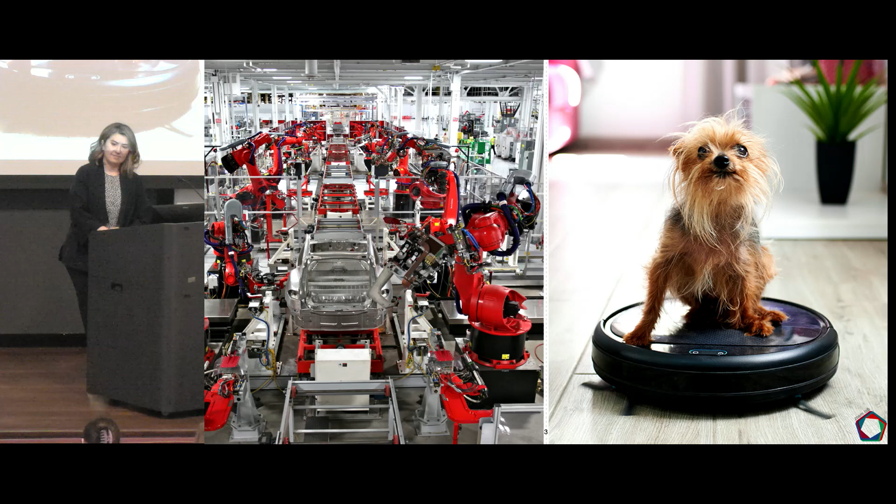But at the same time, we have a very good understanding of this space, which is a very structured environment. We can basically design our space to solve the problem. Sometimes we can even change the problem definition and then design everything to the need. I would say nowadays, though, we are more interested in these kinds of environments and developing robots for these kinds of tasks. Still dirty, dull, and maybe sometimes dangerous, depends. But we are more interested in compact solutions that can work in many different environments that might be structured or unstructured, depending on how tidy you keep your room.

So what are we going to do? How can we actually solve this problem? Or is this problem solved? Because you see that there's a robot vacuum there. Is this problem solved? No, why not? Because I was looking on Amazon, and I saw that you can basically buy a robot, the advanced pro version, for $4,000. It will be delivered to your doorstep, then put some algorithms on it, and it can do whatever you want. So we are done. End of the presentation.

Especially now, there are so many good learning algorithms that we can put on that robot, and then they can probably learn to do very complicated tasks. So is this still not solved? If I buy this robot for $4,000, plus probably tax, can I actually use this robot in these kinds of environments? Or what would it take?

So I basically picked these environments because I am interested in them. I don't want a cooking robot, but I want a helper robot in the kitchen, or maybe a cleaning robot after I cook, because I'm a messy cook. Search and rescue, we have been talking about it since the start of robotics probably, and still we don't have robots in the search and rescue fields doing what the first responders are doing.

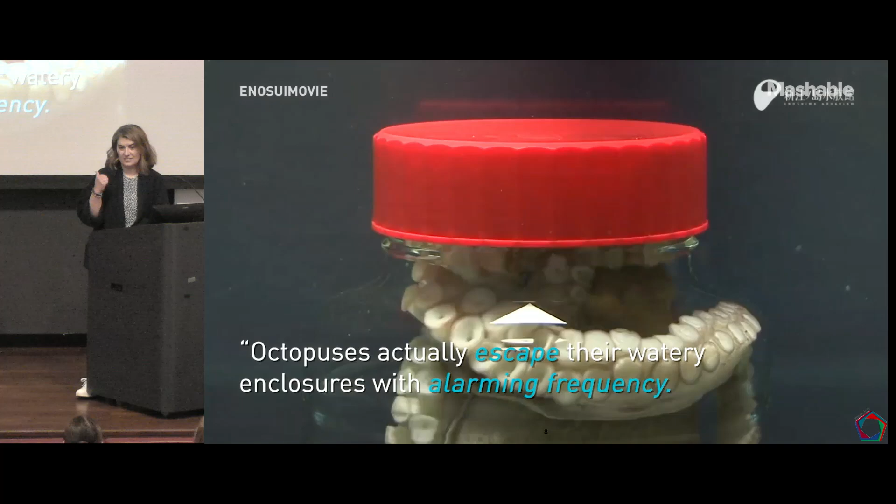If I actually put an octopus in a jar and then close the lid, it can figure out how to turn the lid and open the jar and set itself free. None of those limbs are designed to do this task. They're not fully rigid, right? They are basically not made for this task, but they can figure it out within minutes. So what is the secret here? We have great robots and they cannot, but these kinds of animals can, although they're not designed for it.

So my take, and I'm happy to discuss, is that the robot hardware is what is actually keeping us back, or one of the major things that is keeping us back. So I think embodiment dictates the upper bound of adaptability of whatever algorithm you have. So then, if we want to make robots more adaptable, how can we make them? I approach this problem from two different perspectives, manipulation and locomotion, which are the main features of robots that we have around. So I will show you a couple of examples from my lab today.

These are all the people that are working on these projects. I'm not taking credit. I'm just seeing them once or twice a week, and then we talk, and then I'm like, oh, wow, it's amazing. Keep going, and maybe look at this idea, and they are doing the fun work in the lab, so I'm proud of them, and I'll share their work. And we are a very friendly lab. If you are curious about any projects, please do not hesitate to reach out to these students, and they are more than happy to talk to you anytime.

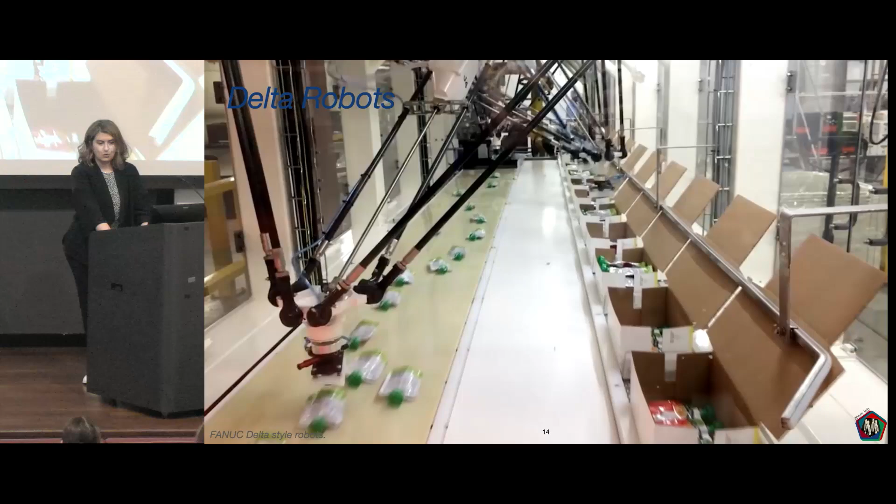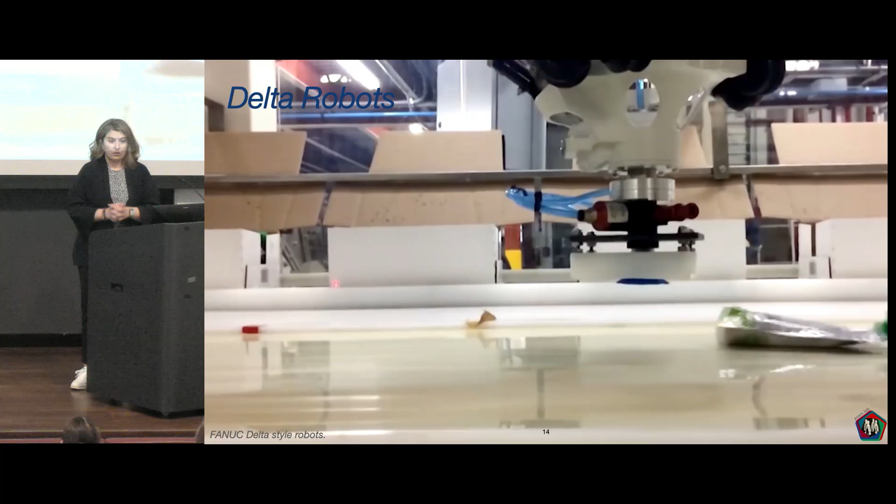Okay, let's start with manipulation. For me, manipulation all started with Delta robots. If you don't know what Delta robots are, they basically have 3 degrees of freedom. They're manipulators. They're very fast. The 3 degrees of freedom are in the translational domain, so X, Y, and Z. And all the mass, all the motors, are at the base, at the top. That's why the linkages are very lightweight, so they can be very fast, precise, and accurate. We really like them for pick and place motions, especially when we don't want people to touch what is being picked and placed, like food or medicine.

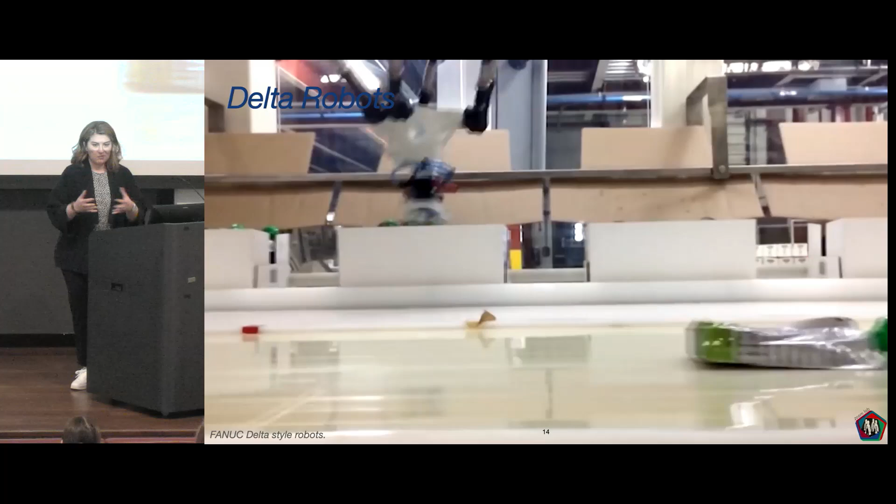So when I started at Professor Wood's microrobotics laboratory, I was looking for a fun project to learn the fabrication tools that they have, which was laminate fabrication, everything at small scale. You cannot use screws, nuts, bolts. So I was like, oh, maybe I can work on making a Delta robot at very small scale with sheet materials. So this was my first project at Harvard. So we built this super fast Delta robot. You can see all these triangle pieces there are piezoelectric actuators. They can work very fast.

Each actuator has 75 to 100 hertz or 100 plus hertz frequency. Although the workspace is very little, we have very accurate and precise motion. And what we actually realized is since this is very compact, we can use it for handheld surgical tools to stabilize the hand tremors that the surgeons have.

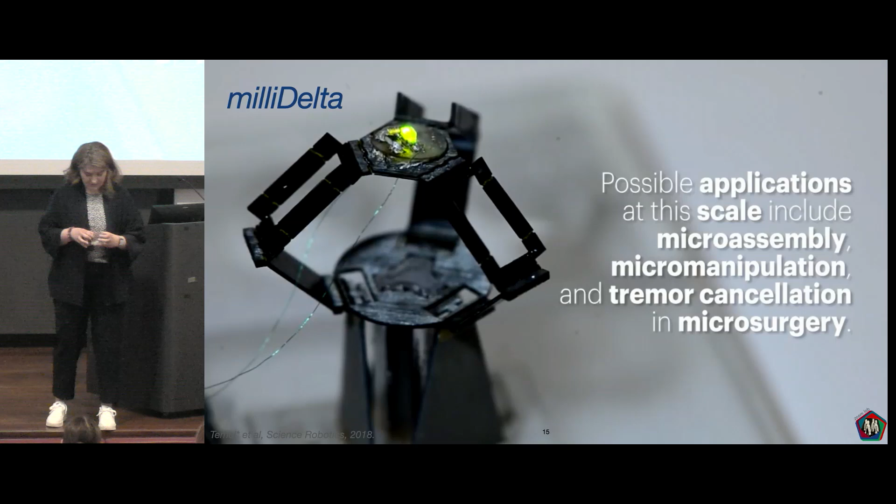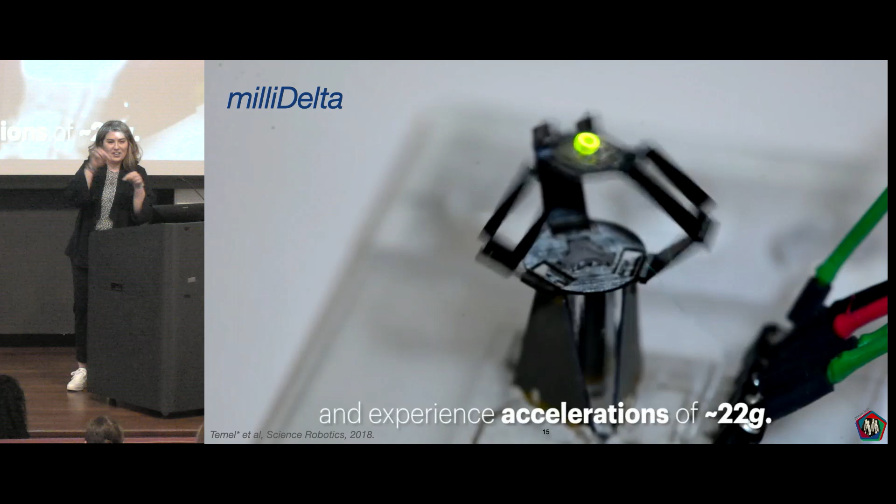Okay, so after this work, I was presenting it at Carnegie Mellon, where I now work, and Professor Oliver was like, oh, your Delta robot is amazing. Let's make a hand with all these Delta robots. They can be great fingers. And this was 2018. It was my interview. And I'm like, I don't know about manipulation, but I think there are a lot of hands in literature. So I was actually right.

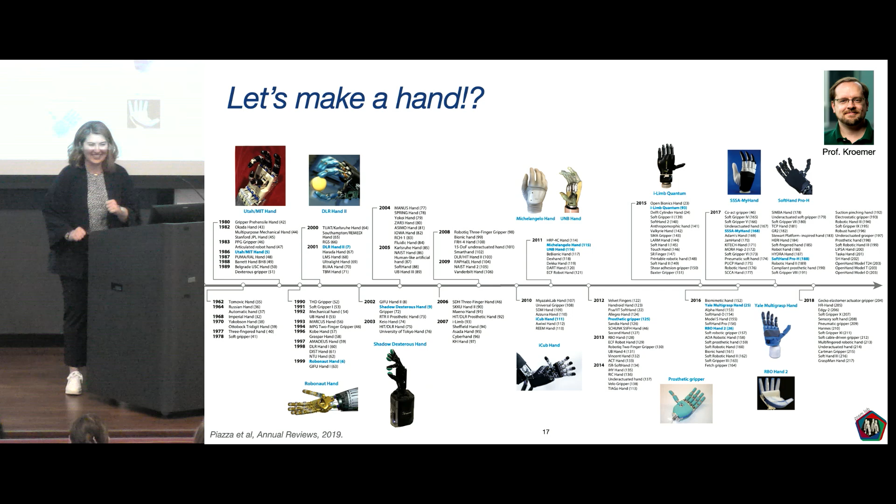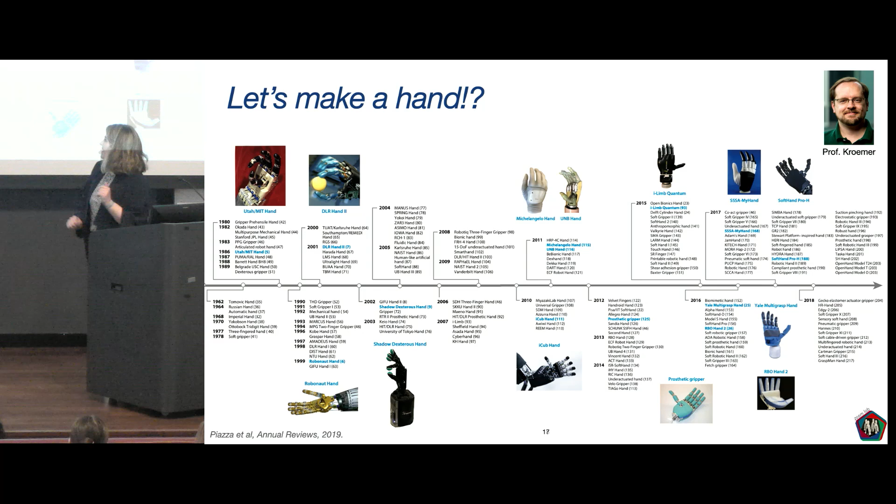These are all the hands since the start of hands in robotics to 2018. And I was like, why do we make a hand? There are already so many people working on making hands. Does it actually make sense? And since 2018, there are actually more hands, with all sorts of materials, manufacturing techniques, scales, and everything.

So honestly, making a Delta hand seemed very ridiculous to me. I was really not sure about this idea, so we should talk to some other people to see if it's actually viable or meaningful or not. So Oliver said, okay, I know two people, Professor Admoni and Mason, Henny and Matt. If you don't know Matt Mason, he is one of the founders of robotic manipulation.

And we presented them this idea that we can work on building some manipulators, grippers or hands that have fingers with multiple degrees of freedom that can perform dexterous manipulation tasks that might be useful to open a pill bottle, take a pill, and feed it to patients. Good idea, but these manipulators should be soft, or safe, if they're interacting with people, and they need to be strong enough if they're opening a pill bottle. You apply quite a bit of force when you try to open a pill bottle.

So safety for humans, and we want it to be accessible, so it needs to be cheap because we want it to be available for everyone. And we want many of them because we need these dexterous motions. So we thought that living hinges, which are basically embedded joints in the structures, are probably the best way to go if we are thinking about the cheapest and easiest manufacturing technique, which is 3D printing. This is where we started.

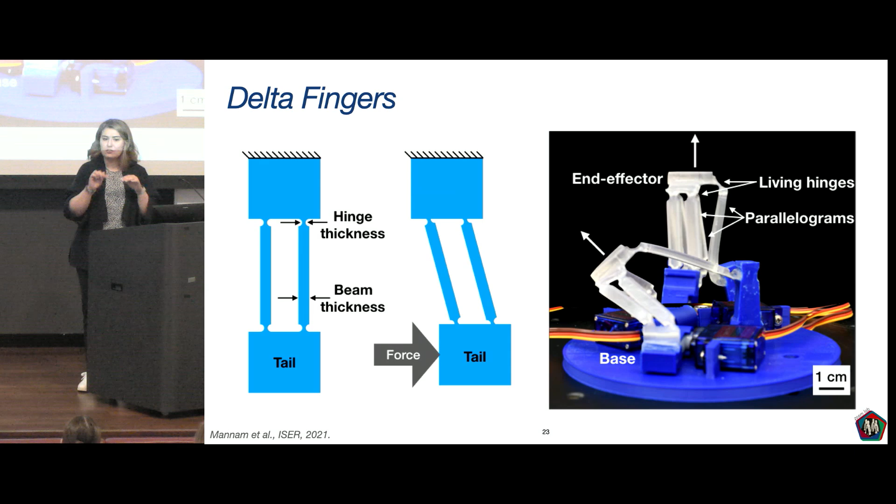So there are advantages and disadvantages to this. First of all, if that rotation is happening, then I want to be able to control it, or at the very least know when it is happening, so I can actually learn the behavior of my manipulator. And second, I actually don't want it all the time, because that 3 degrees of freedom is very helpful for certain tasks.

So we studied different materials, different dimensions, and we figured out that there's a good solution. We can do that if we characterize materials and dimensions properly. And if we go out of a certain workspace, then the end effector will start rotating. So we can actually use that to our advantage too.

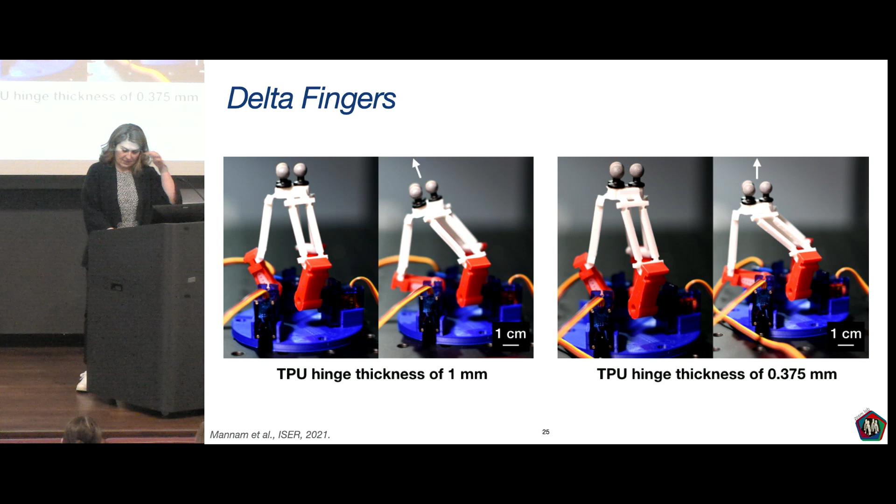So to demonstrate this, and the capabilities of delta fingers, we put 2 of them together and made a gripper. There's a difference between the previous slide and this one. Here, I now have linear actuators instead of rotary actuators. That is because I want to make everything compact, and from now on I will show you mostly the linear actuated deltas.

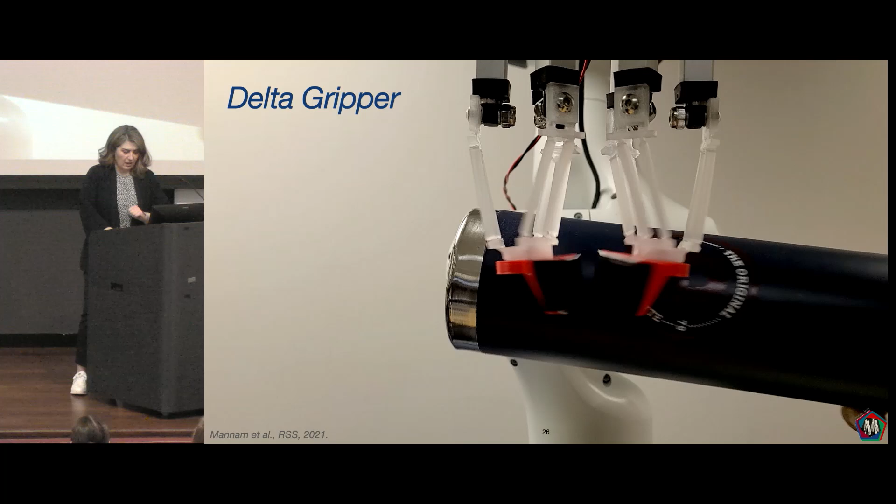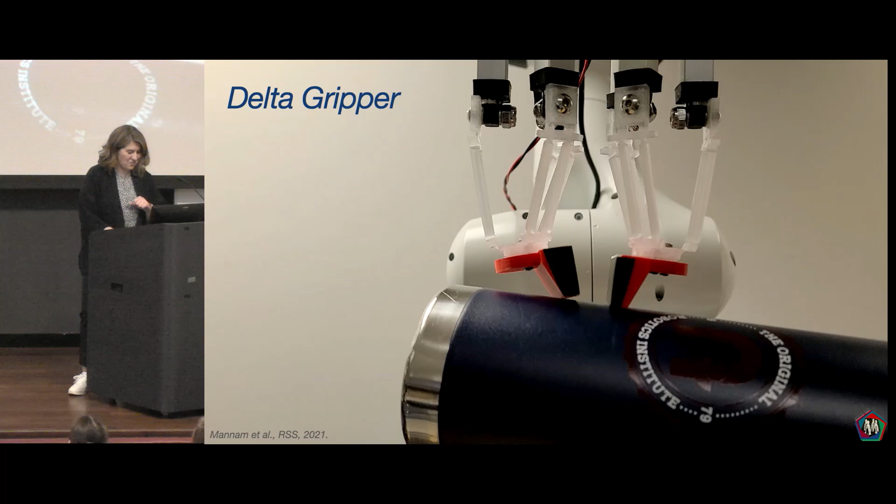So even though they are 3D printed soft end effectors, you can see, and this is the obligatory robot hitting video that we needed to record, they are pretty robust to different forces.

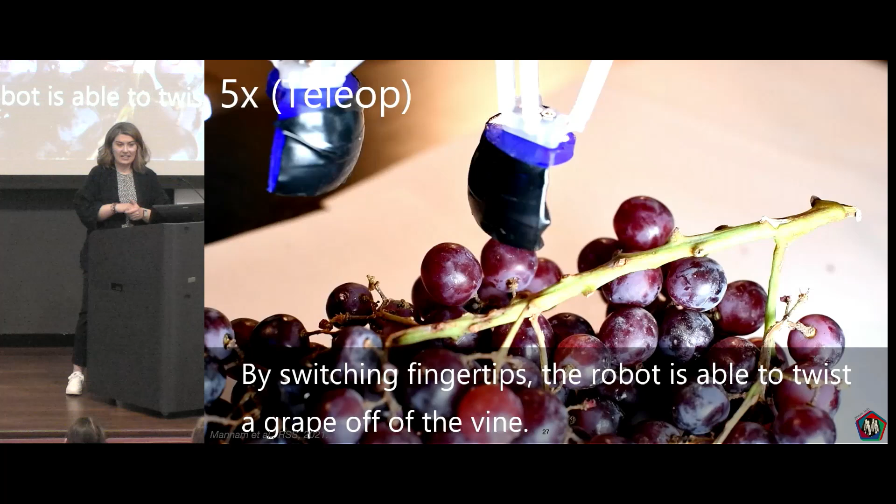And we actually show that if we add some different fingertips, we can do different kinds of dexterous manipulation tasks. I didn't know that these tasks were the tasks that most manipulation people were interested in. But here we are picking a single card from the deck. This task was very difficult because apparently we need to apply quite a bit of force to get the grape out of the stem. But we were able to do that.

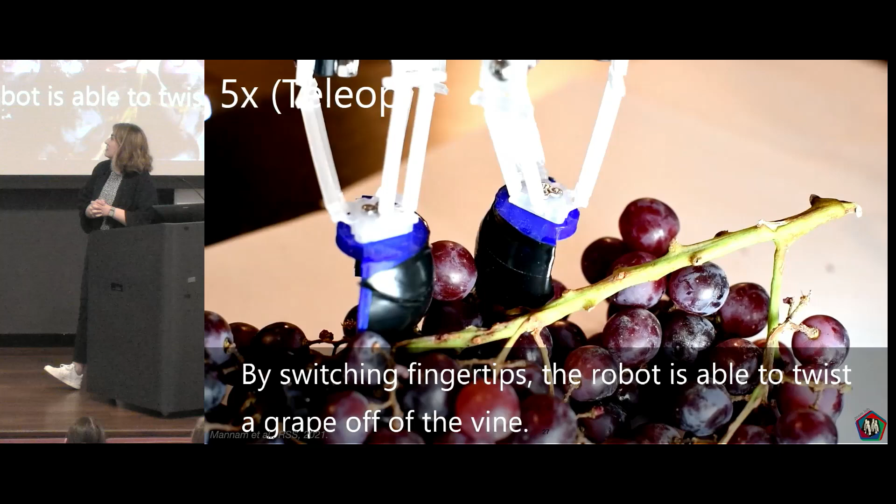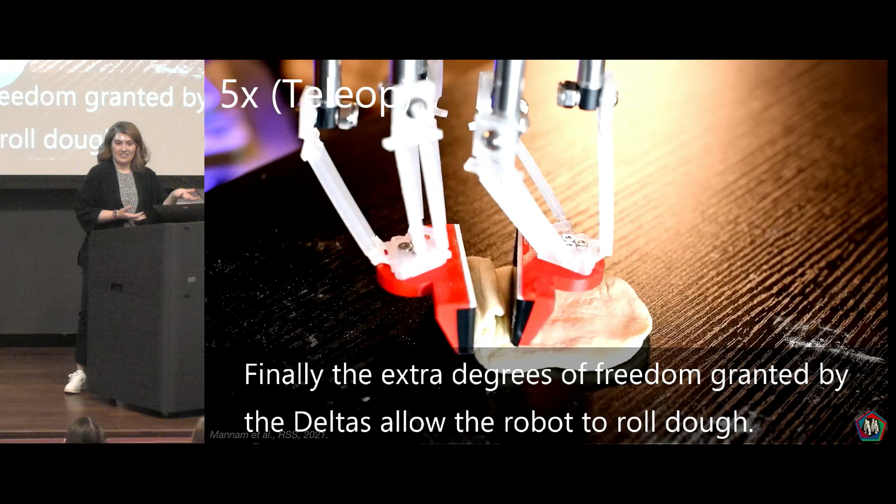And in the last example, you will see that, let's get the grape first. Yes, grape, amazing. And we are not squishing the grape, if you notice. And we can do the dough manipulation. So this was actually very interesting for us because soft body interaction was really interesting to look at, both from the robotics perspective and also the dynamics perspective. So it was a little bit challenging, and they're all teleoperated, you can see here. But eventually we showed that, oh, okay, we can do that.

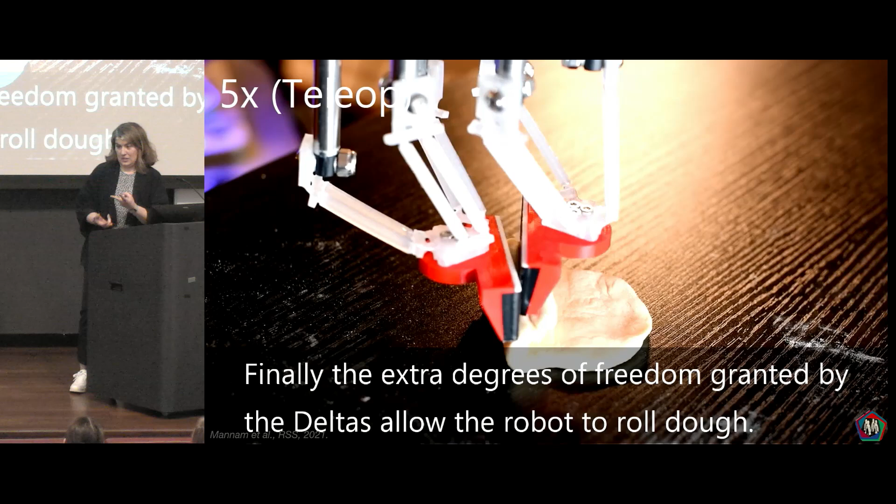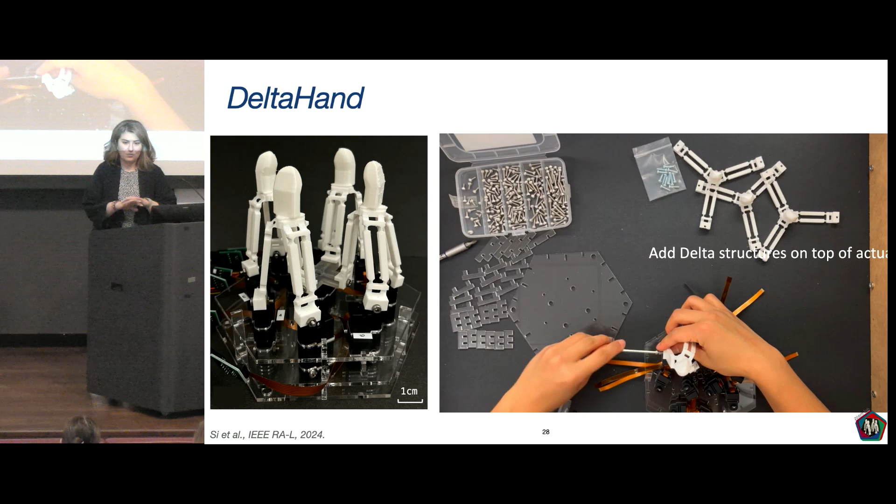So once we had 2 fingers, the next natural step for us was building a hand. And this is basically what we did. So here the graduate student Zilin is putting everything together. You can see all the materials here. If they're not 3D printed, then they're like screws and nuts, it's fine. And then the plates are laser cut. So very cheap, very fast. You can manufacture it within minutes, maybe a couple of hours. Again, we wanted to test it to see if it's strong or not.

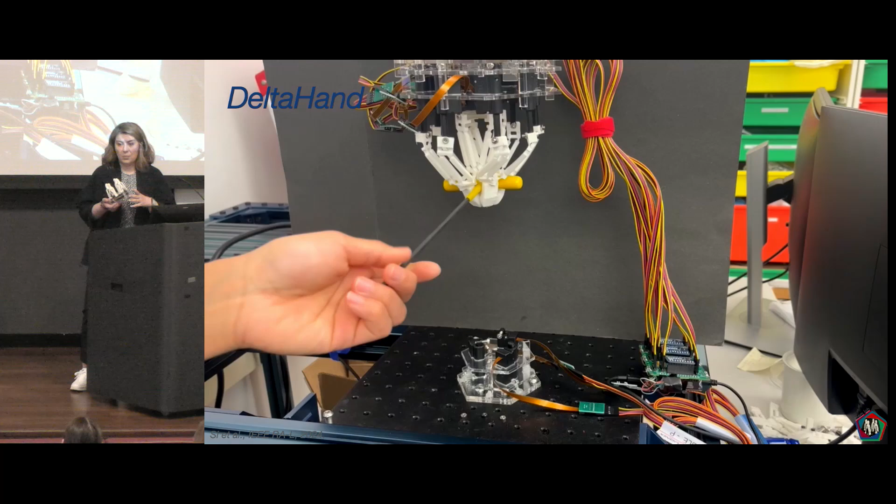And then we studied different synergies. So I told you that delta robots have 3 degrees of freedom, which means that they have 3 actuators, right? But if I put them in this kind of a configuration, then I can actually study coupling of the actuators if I want to. So I can couple some of the actuators together, some of the links together, and then I have 9 actuators. I have here a 5 actuator one. I'll just pass this again.

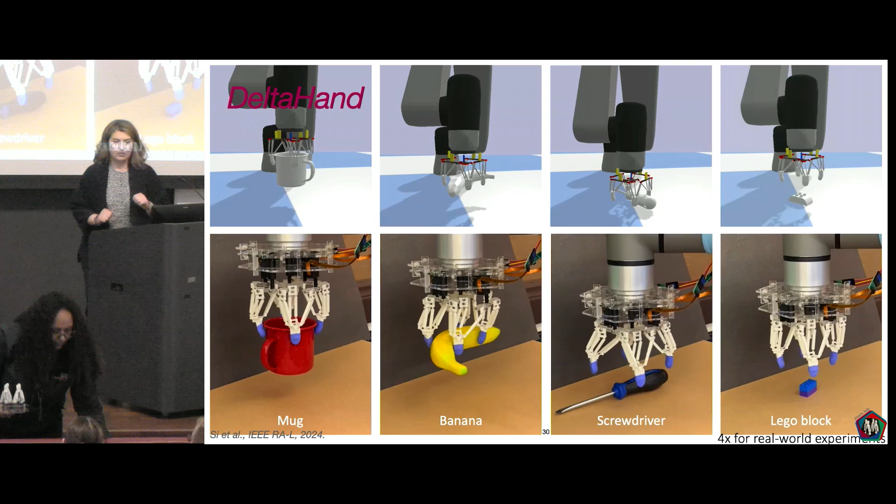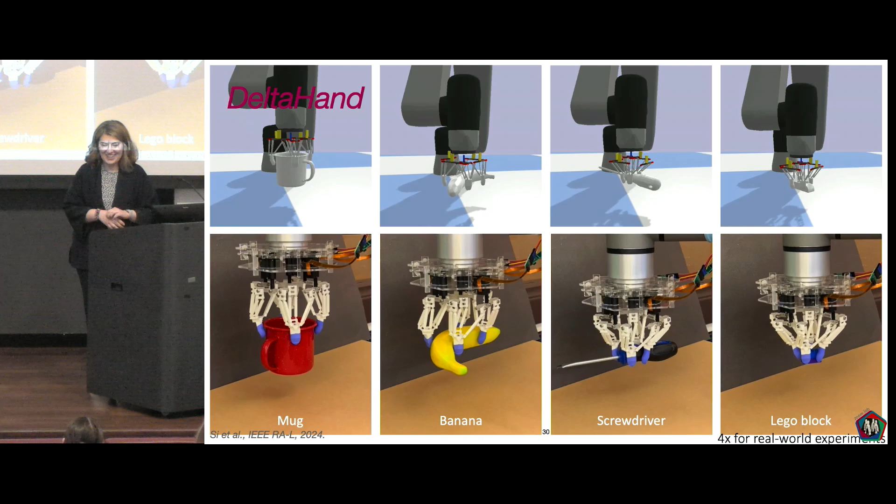Since they were traveling with me to a lot of places, they are actually not super robust, because I think they're broken in my luggage and backpack, but still you can get the idea.

So we studied the synergies between the actuators and linkages. So if we have 5 actuators, 9 actuators, 12 actuators, what kind of tasks we can do. And you can see here that there are a lot of different tasks that we were able to manage. And Zilin is using the Leap camera and then teleoperating with the finger motions. And then we thought that the easiest mapping is between 2 fingers of both your hands to the 4 fingers. And you can see we also did a lot of dexterous manipulation tasks.

Yes, you can hit it. Again, they were in my backpack with a lot of things on top. It's totally fine.

So there were a couple of problems, though. We wanted to see more definition in the motion. So instead of printing them from a single material, we switched to multi-material 3D printing to make the links a little bit stronger. And then the next thing is that the control of this hand was not the easiest thing with the camera there, as you can see, because if you are moving your hand, you're not always at the same altitude, and it was affecting the control. And it was also affecting teaching the robot how to do the tasks.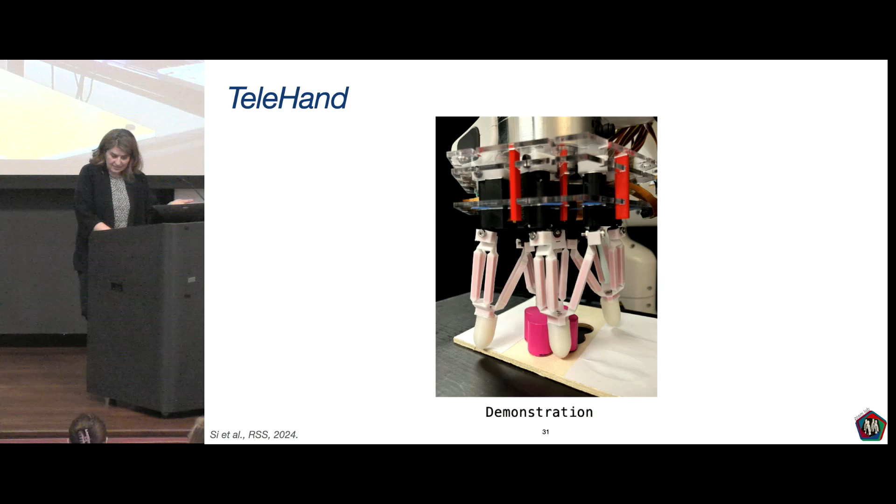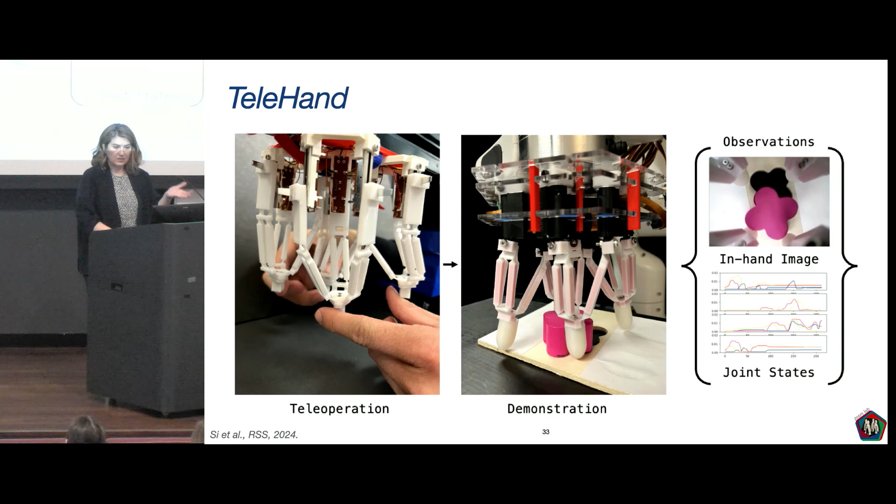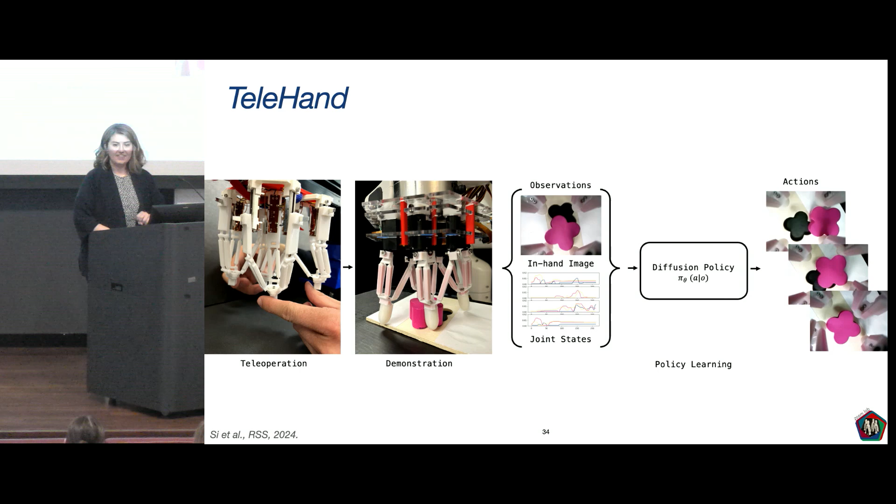So what we did is that you can see the difference now in the color. This is a multi-material 3D delta. We also built a twin of the delta. We call it a mechanical twin or kinematic twin. You can see the sliding actuators there, and then we call it the TeleHand. And we took the data that is coming from the camera in the palm, in the middle of all the deltas, and then we took the joint states, and we did some magical learning stuff there that is totally out of my domain, so I'm not talking about them as a mechanical engineer.

And we performed some training for the Delta robot with this teleoperation system. And the Delta hand was actually able to learn a lot of these tasks from a few training data. We performed 20, 40, 60, 100, and then the success rate was really good. And we also generalized it within different kinds of tasks, like rolling a ball in the hand. Syringe was really difficult, so we actually did a syringe push. Shape insert is also a very classic task that we did. But we basically performed a bunch of dexterous manipulation tasks very successfully.

So then things took some turn because we were like, oh, okay, this is what we think. I like the kinematic twin better. It makes sense because I like hands-on things. But would people actually like that too? What is the best method to teach people how to train the robots? What would be the preferable way? So we did some user studies. We asked people to control the robot either through a kinematic twin or a visual tracking system, and then collected a lot of data.

Oh, thank you. You can keep them.

Not until the end of the... Okay, and then we ask people to perform these 3 tasks. Basically, it is a block sliding task, but it gets more and more difficult, because we are changing the angle about how you slide the block. And the results were actually very interesting to me.

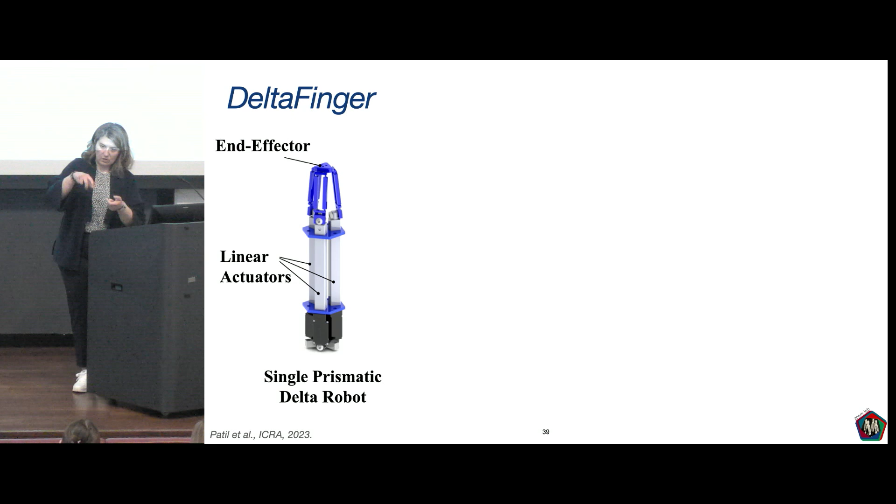Yeah, so we really wanted it to, how can I say, buckle after some forces, if you are especially designing this to interact with people, right? So I don't want the robot to be able to apply a lot of forces. So we did a lot of studies about where should the actuator be located to apply enough force for these kind of tasks. So it was modeling and experimental studies about what is the design of this robot so that I can get enough force to do these things, but also buckle when I need to.

Yeah. Okay, so we have one finger. Cool. We put 4 of them together, made a hand. Great. What's the next step? What? Yeah, maybe. It's actually a good idea. We studied the 3rd finger thing, the thumb thing. It's not published yet, but we are working on it. But we wanted to go crazier.

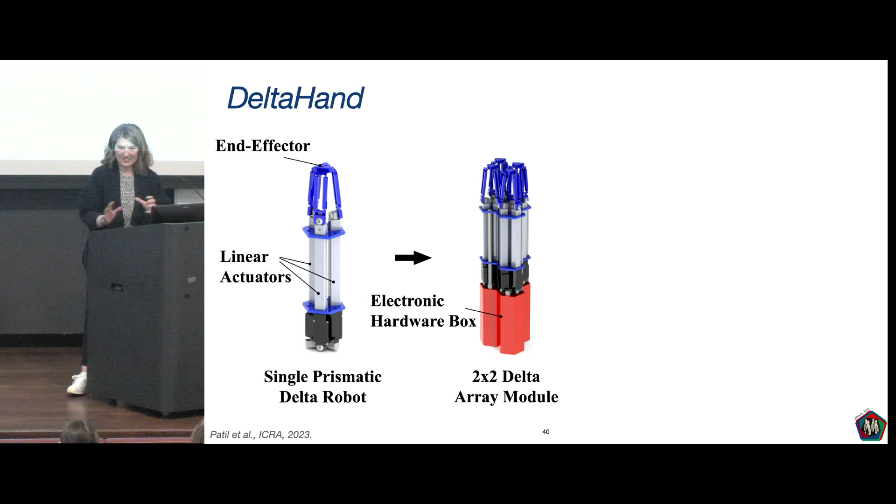And to some people, the next thing is the craziest setup at Carnegie Mellon Robotics. Why not we make like 64 of them? I see some faces and I'm like, why? Come on, we want to have fun. Look at this, isn't it cool? So you can see a lot of these kind of examples actually in literature. Most of them are doing like 1 degree of freedom motion, right? This whole array of robots doing 1 degree of freedom motion.

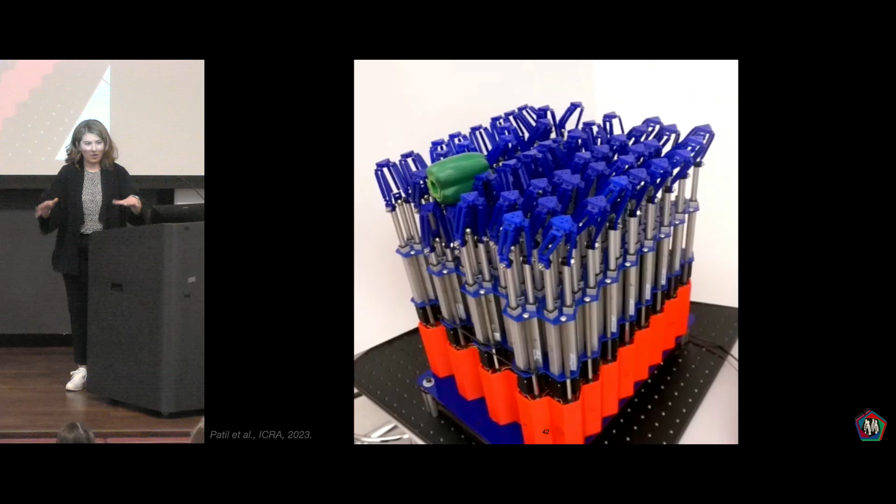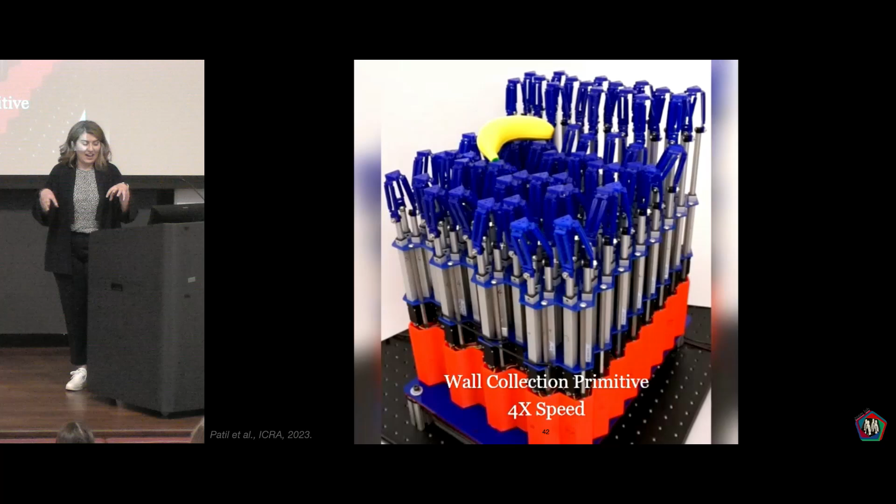Here we can do like 3 degrees of freedom. So we can actually study a lot of different tasks. We can divide the robots into groups. They can do different tasks at the same time. They can deal with multiple materials at the same time. They can create structures like walls to basically help them, and this is a great control problem. How will we control these robots?

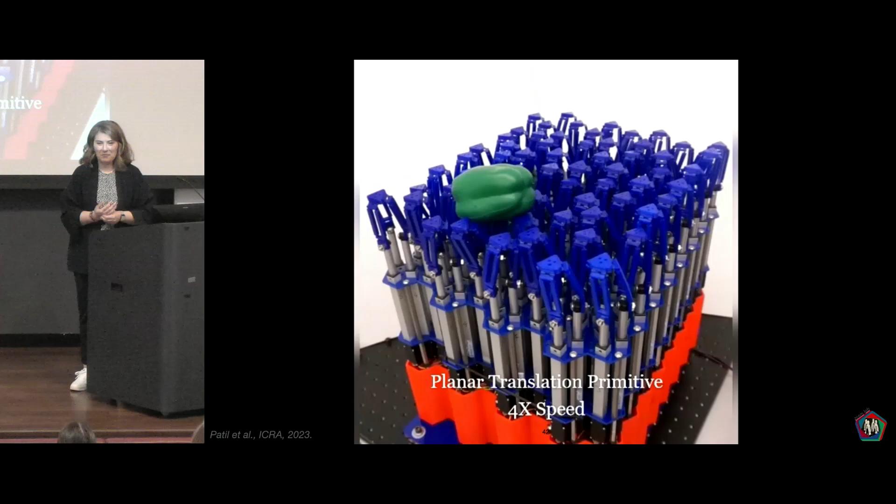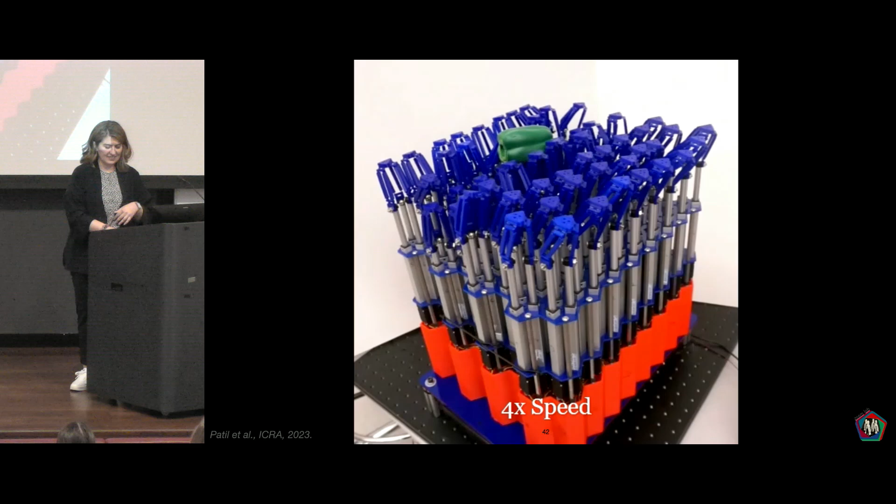They're all compliant, soft. These are not multi-material. These are all TPU. So how will I actually control 192 actuators, if I did the math correctly, in a meaningful way in the space? And why did I do that? Because again, I want a robot to help me to cook. So I want to turn this robot upside down, like in this photo. And I wanted it to open a dough for me so that I can make pizzas or whatever I want to, right?

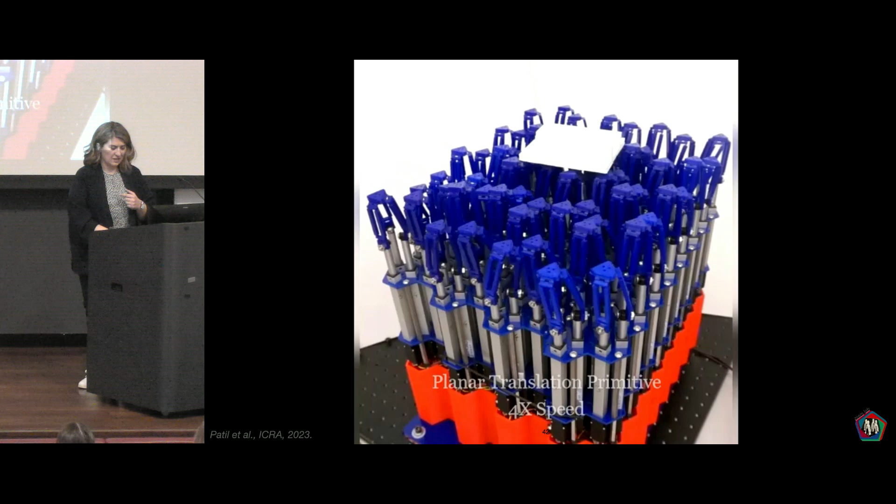So in order to do that, you can see that this setup has nothing on top. But in the next one, we added some fingertips, so that we can actually interact with objects easier. And those fingertips are inspired by our own fingertips, have a rigid core and a compliant shell, so that we can actually capture the materials better. I'll only show one video, and I'll tell you what the problems are we are facing. So this is the first time we were actually able to take a block and lift a block in air using a couple of them. Because first of all, again, kinematics are not very well known.

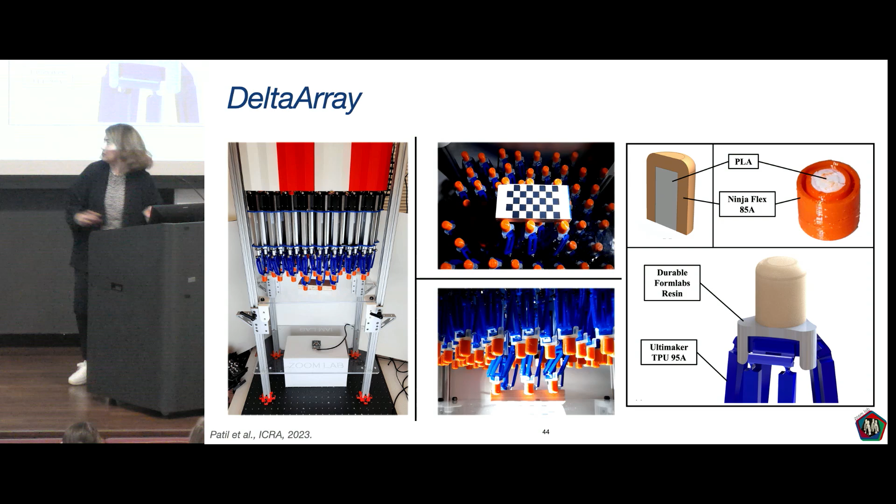We have a camera, you see here under the setup, but most of the time, if you are looking with the camera, the block is blocking some of the robots, and sometimes the robots are blocking some of the robots, so it is not the best way to control. And there are 64 of them. So it is kind of a multi-agent control problem, and multi-agent learning problem. How are we going to find the right way to control?

So we are now working on this. I'm very excited. I saw the faces. It's a crazy setup, but I think it is a great setup to learn about all these different kinds of control and learning problems.

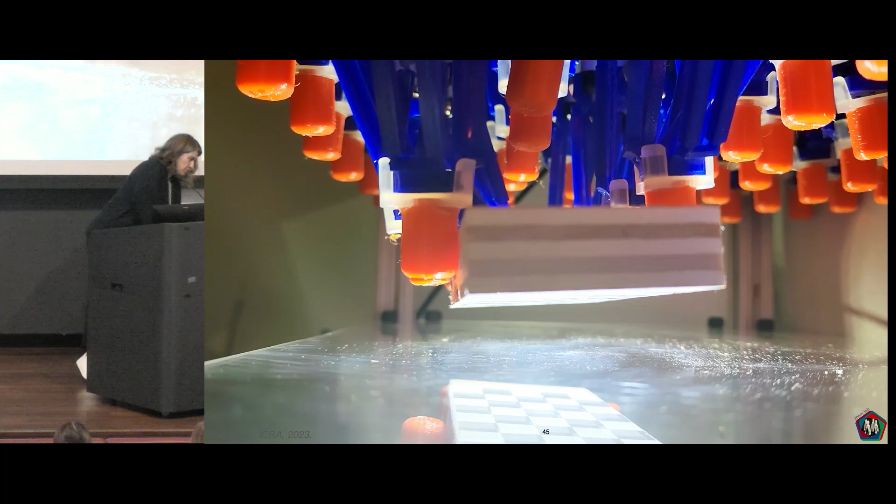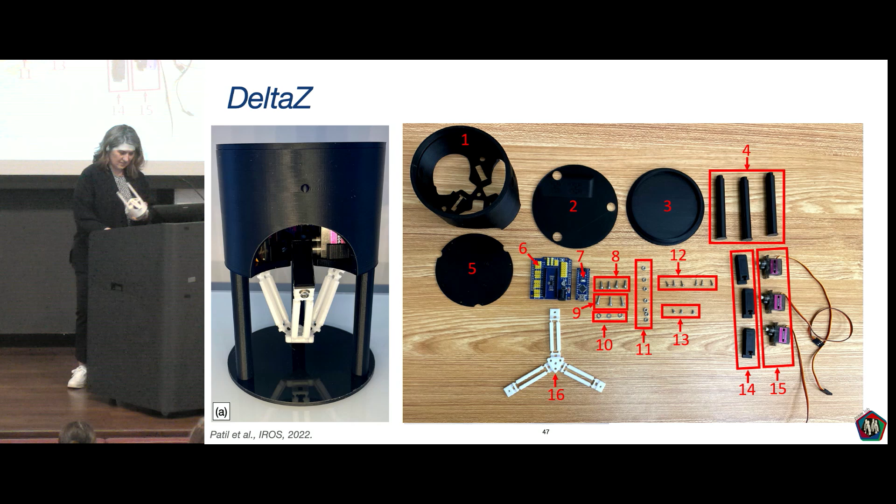Okay, one last thing about this. What we also did is we basically turned the Delta robots into a very affordable learning tool for robotics. So this is Delta Z. You can see all the parts here. They're all online in GitHub. You can find how to design, how to make, where to buy the components. You can also design and build your own end effectors and then put them together.

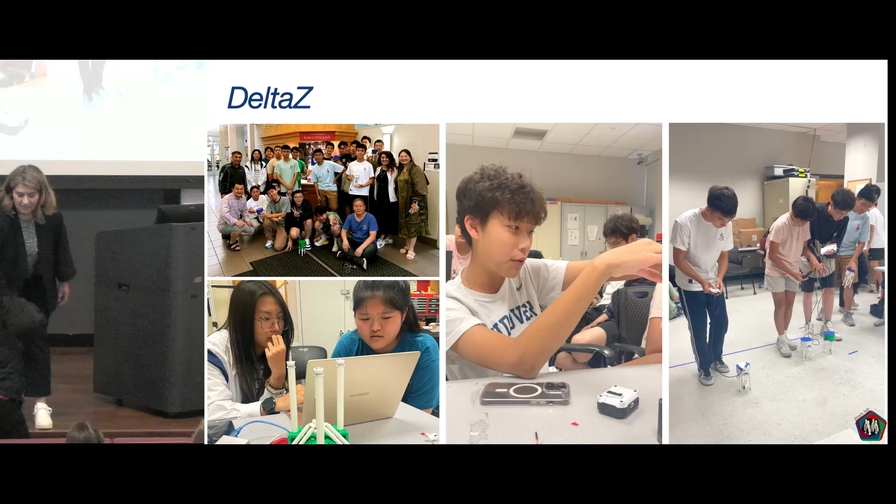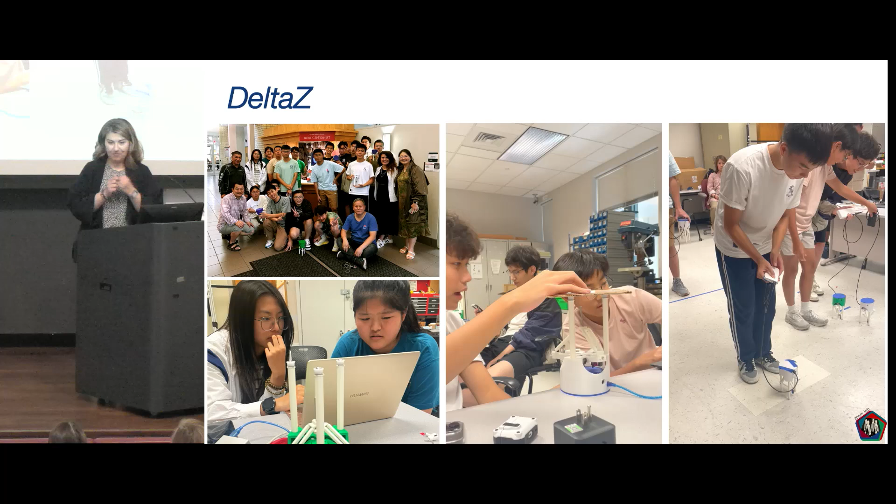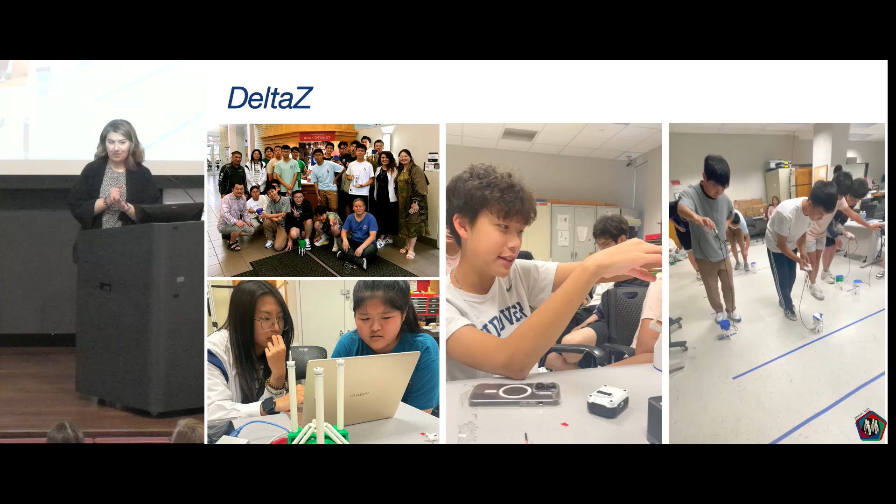We also put together a user interface for you to play and learn. And then we made a curriculum around this robot. So this robot is around $50, so not really very expensive. And you can actually teach everything about robotics. This is my claim. You can teach everything about robotics using this, from design, manufacturing, because you can also use different manufacturing techniques, right? From actuators, how to control them, what kind of sensors you want to use to control them. If you want to actually apply some learning algorithms on it, if you want to do computer vision for it.

And also, this is what my summer school students did. They said, oh, we want to make a walking robot, like a moving robot. And I'm like, this is a manipulator. Why do you want to make a walking robot? But they added some wheels, as you can see on the videos, and then it turned into a walking robot. So you can even teach manipulation or locomotion using this robot.

Again, this is all open source. You can find it online. I'm organizing another summer camp using this robot this year. I'm very excited about it because it's just fun to see how students also bring their own ideas.

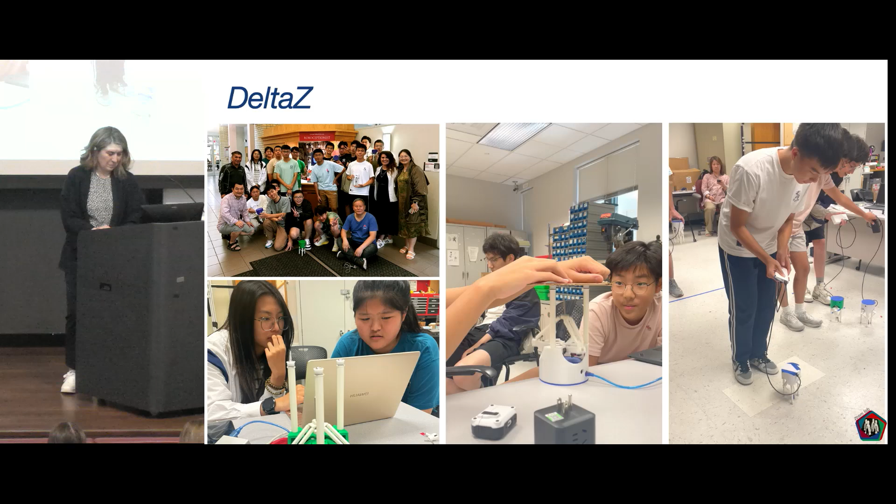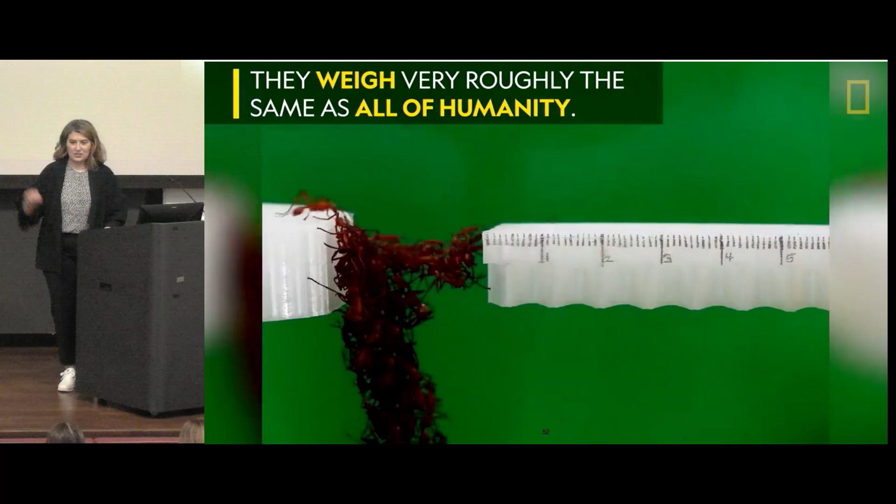Okay, maybe this is a good time to switch topics from manipulation to locomotion. So I will talk a little bit about collaborative robots to show you how I can make the locomotion more adaptable to different scenarios. So for me, this all started with this video where army ants are coming together to build a bridge. The amazing thing about army ants is that they can actually build this bridge and then change the shape or structure of the bridge with the changing conditions. So they are adapting to dynamic environments.

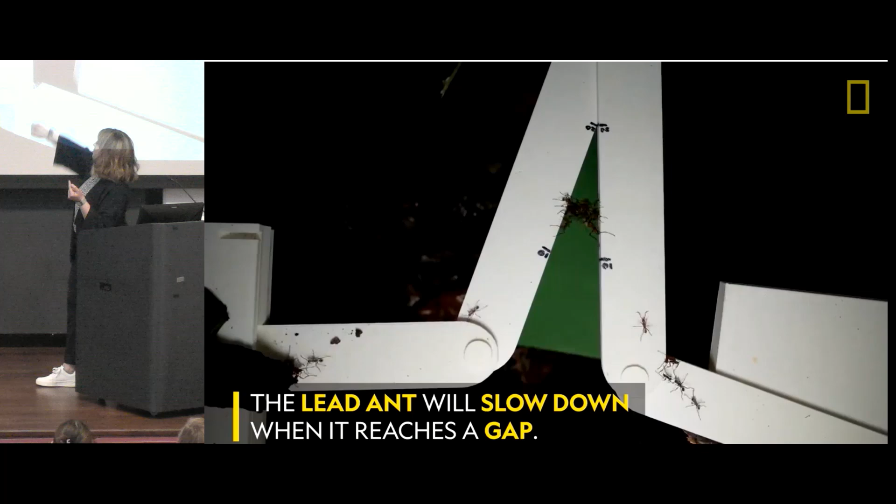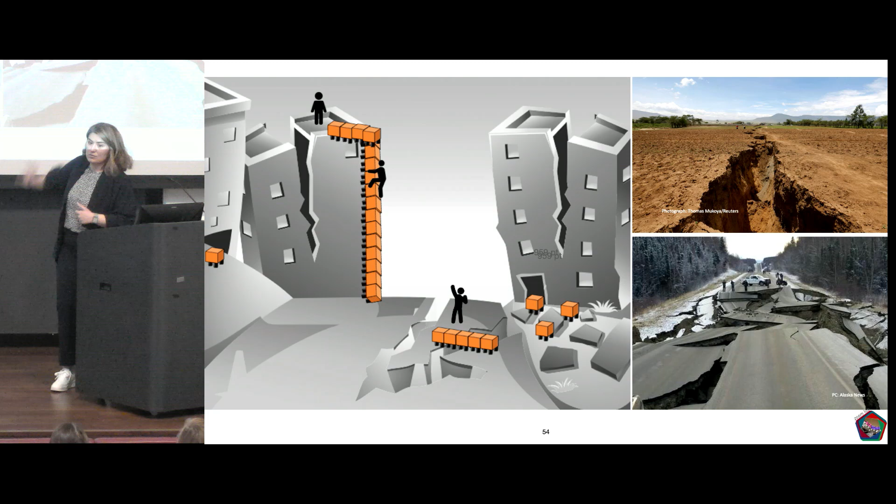The other thing is that they are very smart, although they are super tiny. So for example here, they are not going all the way up and coming down, or they are not creating the bridge here. So why do they pick this? How do they optimize their path and then make the bridge there? How do they know how many ants they need to make the bridge? How do they know how much load they need to carry? They are all very interesting questions. So we thought that if we can figure this out, then we can basically make robots to work in disaster zones.

Okay, so what do I want? I want to make reconfigurable collaborative robots. I want them to work individually, like ants, but I also want them to come together to overcome obstacles. And many different kinds of obstacles. They can be negative gaps, or they can be positive gaps. They can be just step downs, right? Different things. I want them to be energy efficient, because this is one of the problems in those kinds of fields. And I want them to be strong enough to perform the tasks that I want them to perform.

These are the puzzle bots, the first versions of them. You can see they look nothing like ants. But at the end, that's not the purpose. The purpose is to study their behavior and see if we can do the same things with robots.

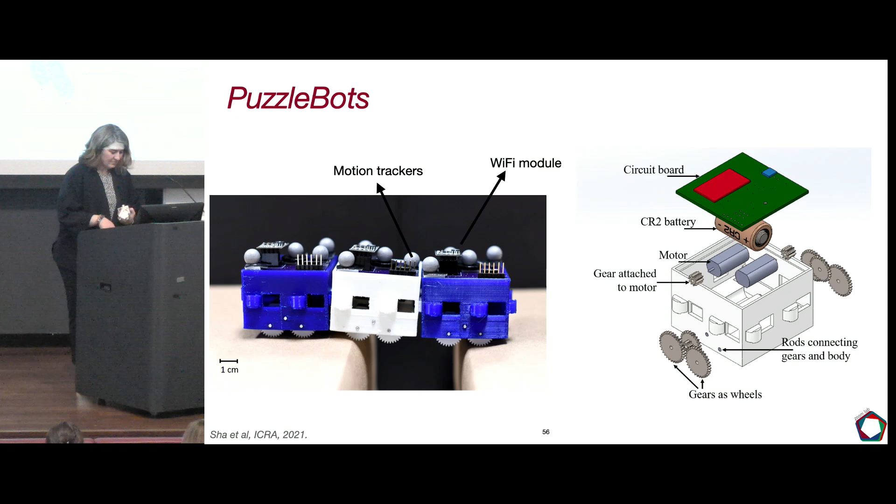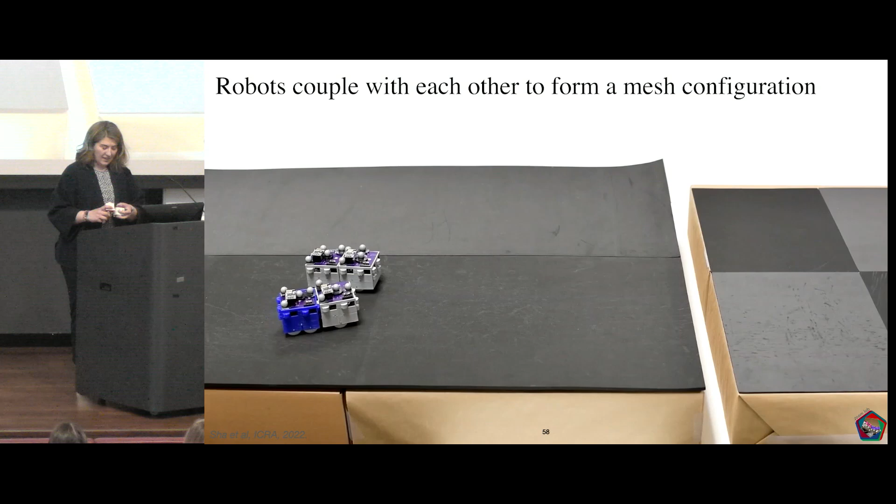Here is the first video that my graduate student, Yisha, recorded, which I really like. So they form a bridge and then cross the gap. And not only can they form a line, but they can also form a mesh structure to, you know, cross bigger gaps, because now they are stronger.

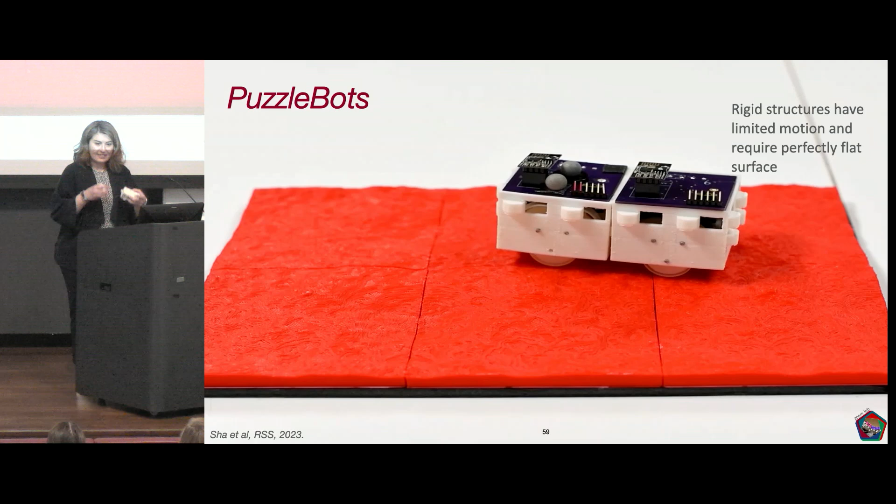But they suck at something, which is uneven terrain. Because at that time, their connection was rigid, they connect through knobs and holes, and that rigidity really didn't help them to cover those kinds of terrains. The other thing is this. They fail terribly if they are trying to take a step down.

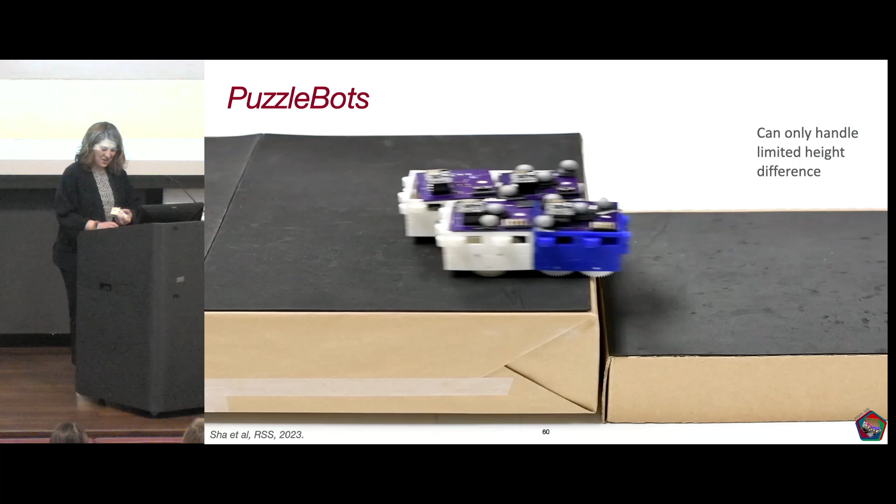So the solution to this is we needed a flexible attachment between the robots. And again, I am very frugal with respect to adding actuators or sensors to robots. So I was like, I don't want it to be active, I want it to be passive. So Yisha designed an anchor mechanism that is easy to connect and difficult to disconnect. And we did some experiments with those robots.

So I have a couple of them here. I'll pass them around. One of them is not very well assembled, so you can actually see what's inside. I like this. Yeah, I wish I could carry the 64.

Anyway, okay, so this is how they attach and detach. You need a little bit of a wiggle between robots to detach. It's very easy. Now, because they have the flexible structure, they can actually take turns, which is really helpful for us to clear these kinds of environments. Now they are successfully going across these kinds of terrains.

Do you have a question?

Okay, sure? Okay. And the other thing that we can do is they can now take a step down, I think. Yeah, come on, you can do it. Yes, come on, yes. Yes, they can do it.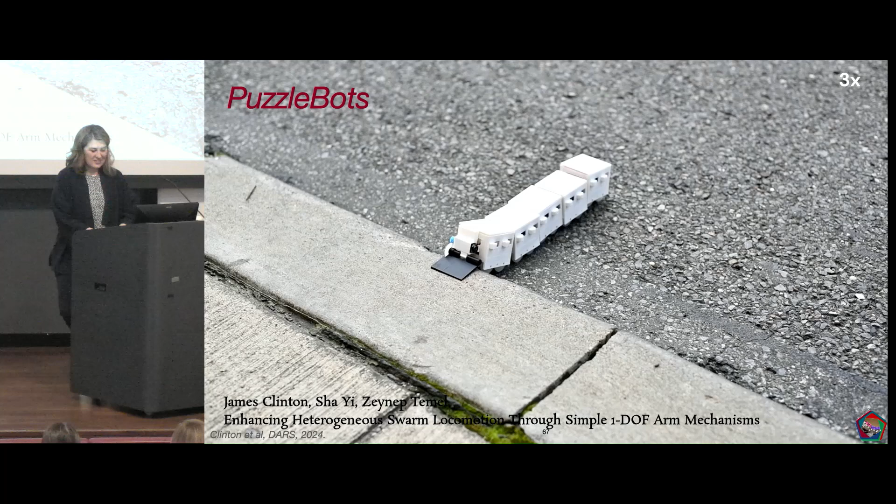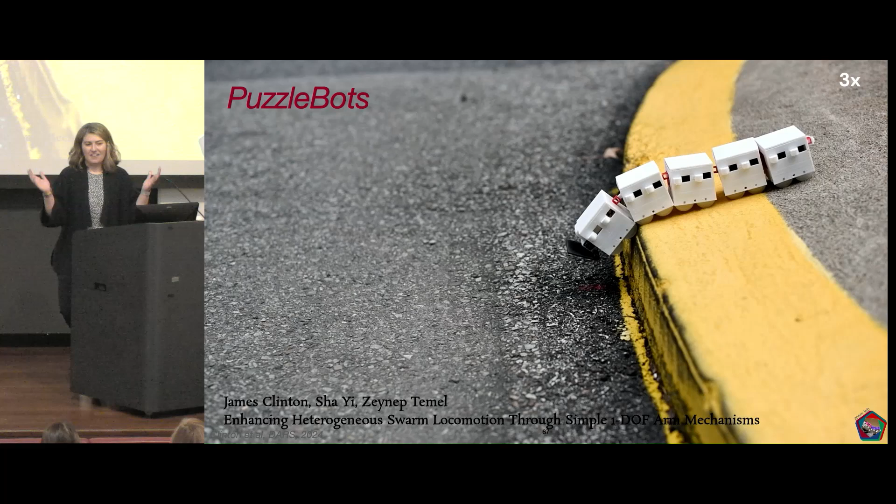And then I was fortunate enough to work with James as one of the summer undergraduates in my lab a couple of years ago. He is now a graduate student at UC Santa Barbara. He said, hey, I really want to add another actuator because not only stepping down, I want them to climb. And I said, okay, fine, I'm caving, add another actuator. So this is what he did. And this arm is helping not only to step up, but also to step down larger distances.

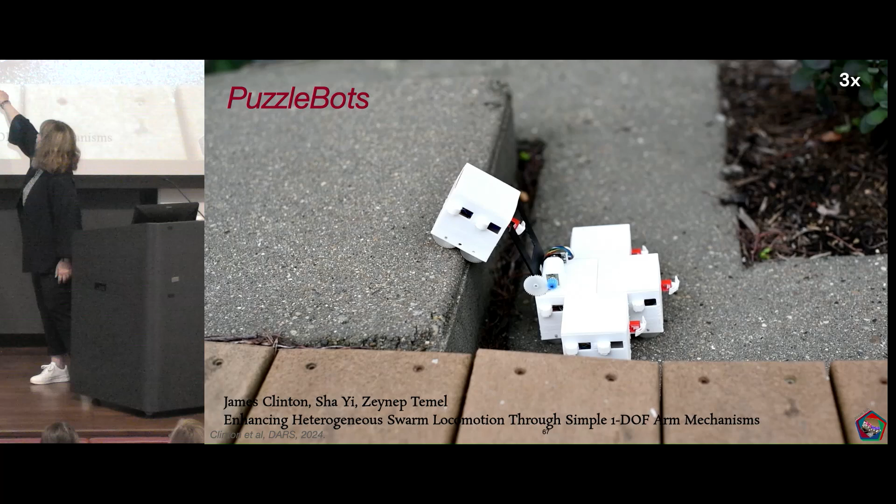And also, with the other actuator, we can now push the robots to surfaces that we cannot reach, so they can keep exploring. I think one of my favorite things about this video, if you look closely, I don't know if you can see there, there is an ant walking there on the robot. It's so funny.

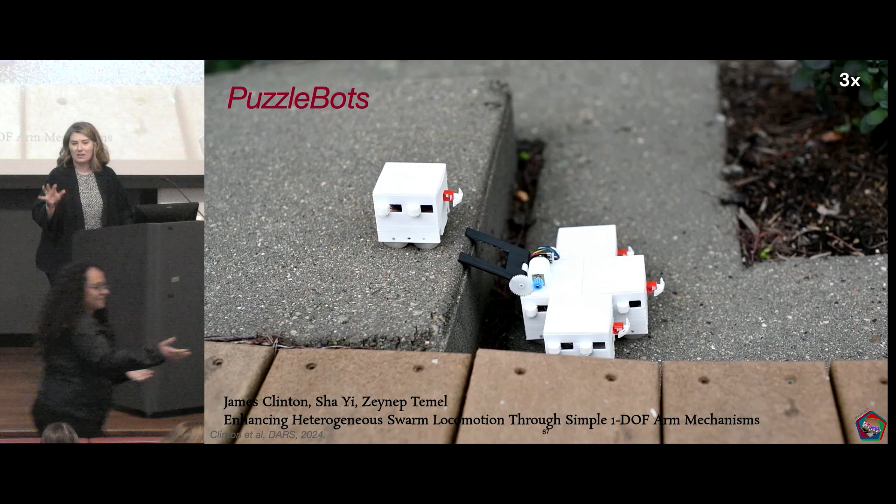Okay, so what I learned from this project is that not all the robots should be the same if I want to perform bigger tasks than the robot, right? I really value the heterogeneity here. So how can I make it even more heterogeneous? Because I think those robots, although capable, and I can keep working on them to make them more and more capable, would not be super useful to clear this area.

Because still, those robots have small batteries, as you can see, and then we keep adding more stuff on them to make them more and more capable, right? So that means that I am increasing my energy consumption. So if I want to get into these kinds of environments, even after a few meters, my robot will be dead. So what can I do?

So I was brainstorming with my colleague, Professor Mel Martinez, and my colleague from Purdue, Laura Blumenschein. And then we said that if we had a bigger robot to carry our small robots to the field, we could probably figure this out in a better way. But I was like, I don't want any big robots like the robot dog because they're loud and they're really not squeezable. And I think the sound is my biggest thing because in these kinds of environments, you really want a quiet operation to hear possible survivors. So we came up with this idea.

Laura is working on growing soft vine robots. Have you heard about vine robots? If you haven't, they're basically like a plastic bag, and they grow from inside to outside, and then they can go meters-long distances, and they're very quiet. And since they are soft, they can actually squeeze themselves into very small areas.

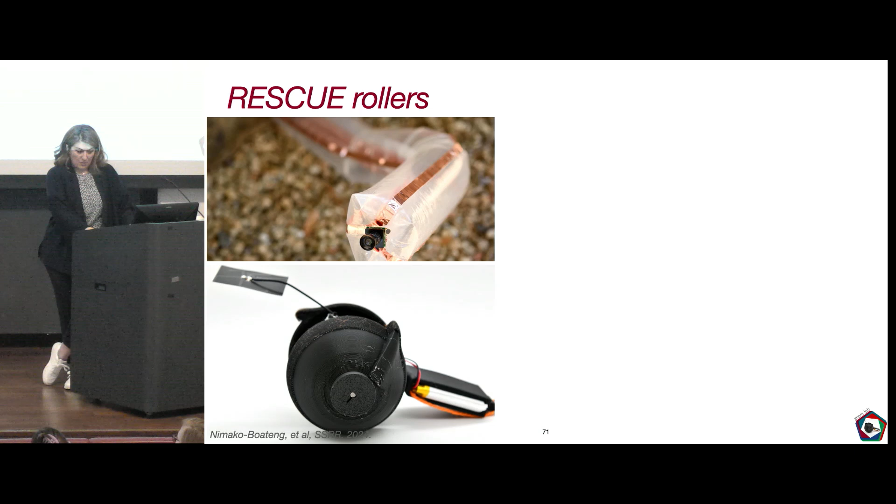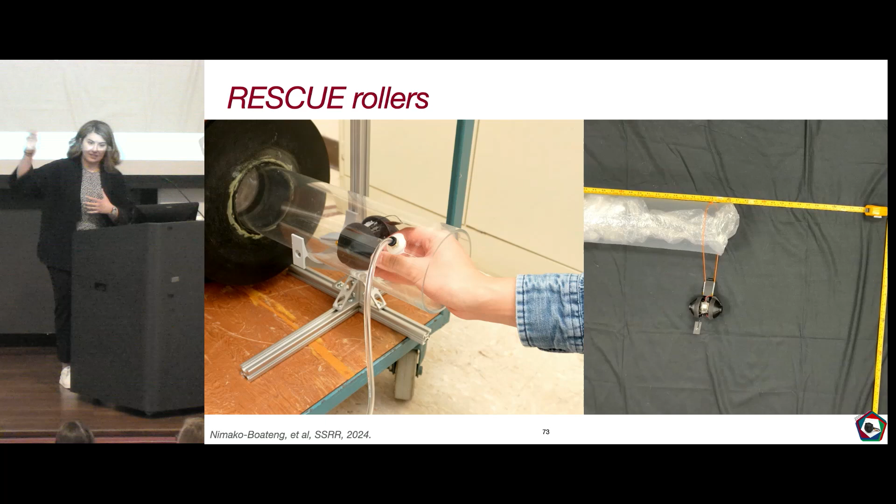So you can see a vine robot there, and this is what we designed. We call them rescue rollers. Again, a very simple design. These are our first experiments. So we are loading one of the rescue rollers inside the vine robot.

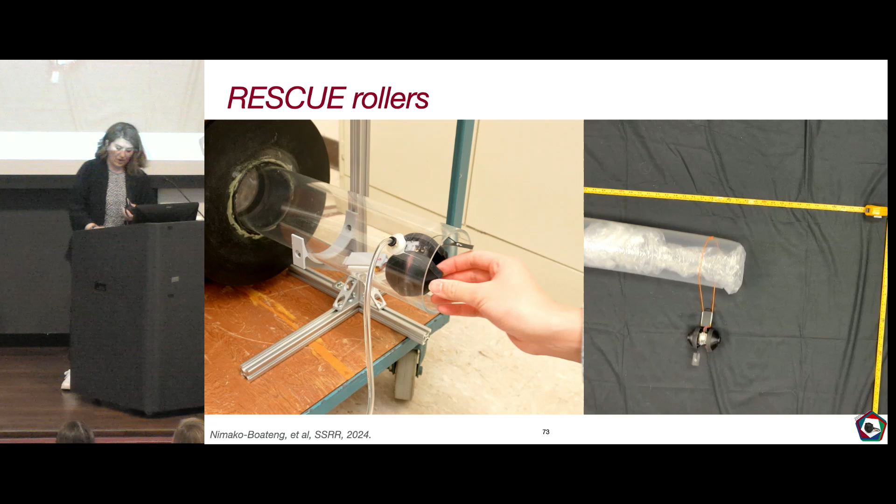And then, yeah, you can see the rescue roller is moving inside, and then you can see here how the rescue roller is pulling the vine robot to change its direction. So this is one of our first demos, the same experiment from two different views.

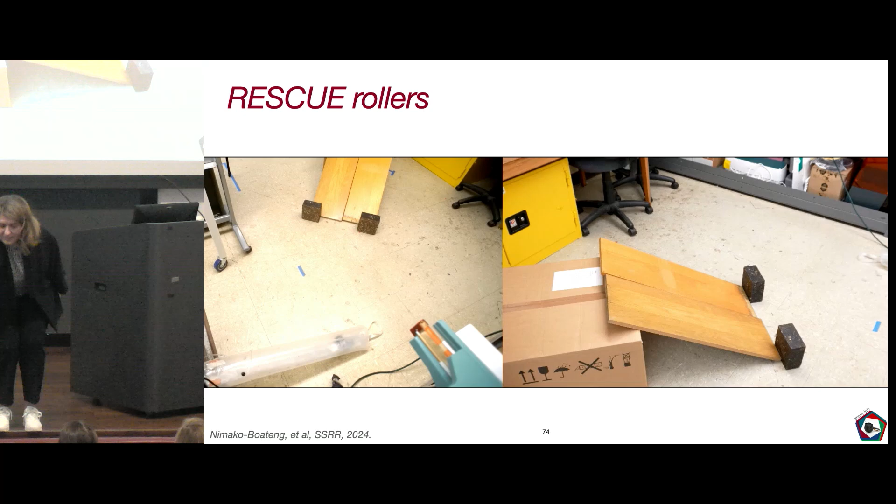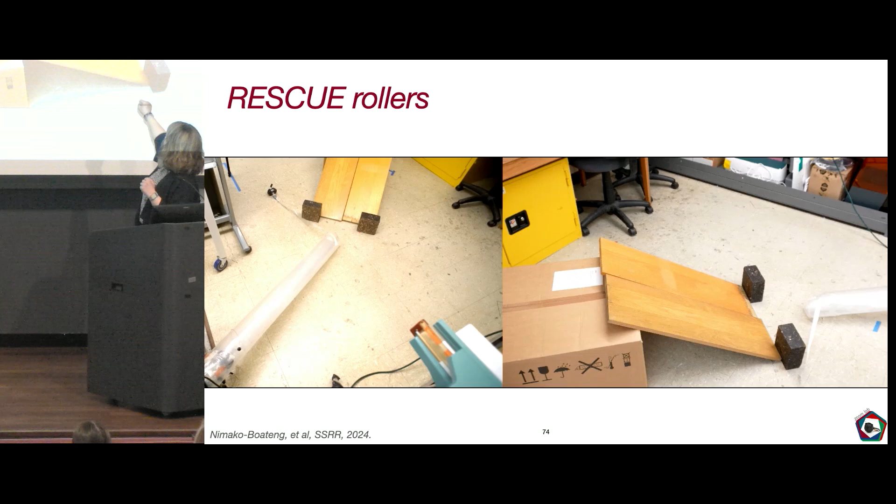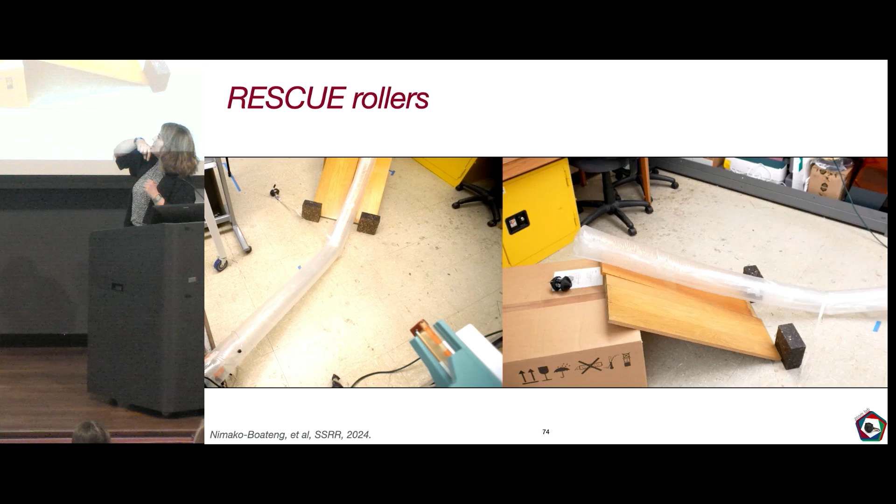The rescue roller, we now have different versions of this, but again, I'm only allowed to take these kind of demo pieces. So you saw that the rescue roller came out and then pulled the vine robot to change its direction significantly so that it can actually grow towards this hill or incline. Let's wait a little. And you can see the other rescue roller coming as the vine robot is growing. And once it's there, it can deploy another rescue roller, and then it can work on that environment as well.

So this is the concept, but the study in the real world is a little bit challenging. So we put together a simulation environment where we basically introduced different environmental features like gaps or hills, and also some points of interest like high temperature or humidity. And we did a couple of experiments. I think you can see here if the vine robot and the rescue rollers work together, we have a higher coverage of the environment. And actually, this is a better view of that.

So on the top left, you can see the vine robot with rescue rollers, and rescue rollers are deployed every minute. And here it is vine robots only, and that is rescue rollers only. And here there is no intelligence in the robots. So they're just doing random motions. So even with the random motions, first of all, we get a big difference from only the vine robot.

So you can see that coverage is 50% there if you are using only rescue rollers, which is not bad. But coverage reaches 63% if you use both of the robots together. So this is actually quite high. And again, there is no intelligence in these robots. So if we add the intelligence, which we are now working on, then we can actually make it even better.

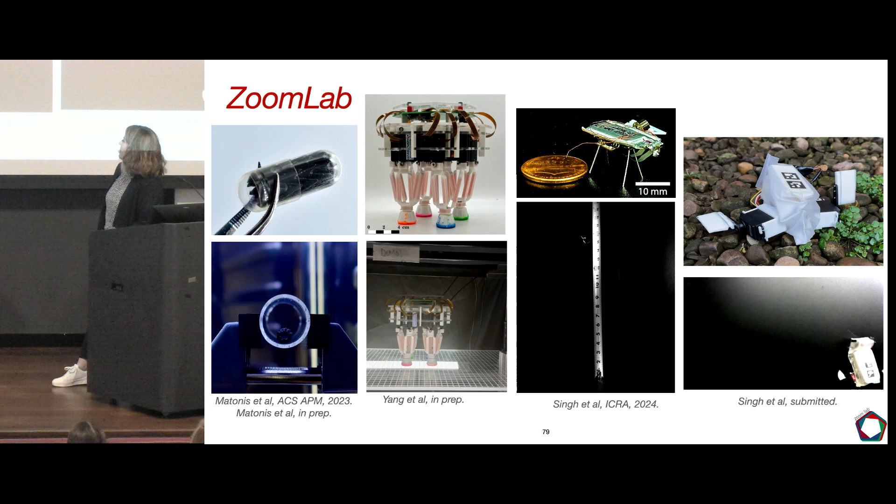A collaboration with Professor Ryan St. Pierre at the University of Buffalo about a really centimeter scale, 1 centimeter scale multimodal robot that is untethered, that can jump and also crawl. And then there's a shape-changing swimmer, again, a multimodal locomotion robot that can swim undersea, sail on the surface of the sea, and then walk on land.

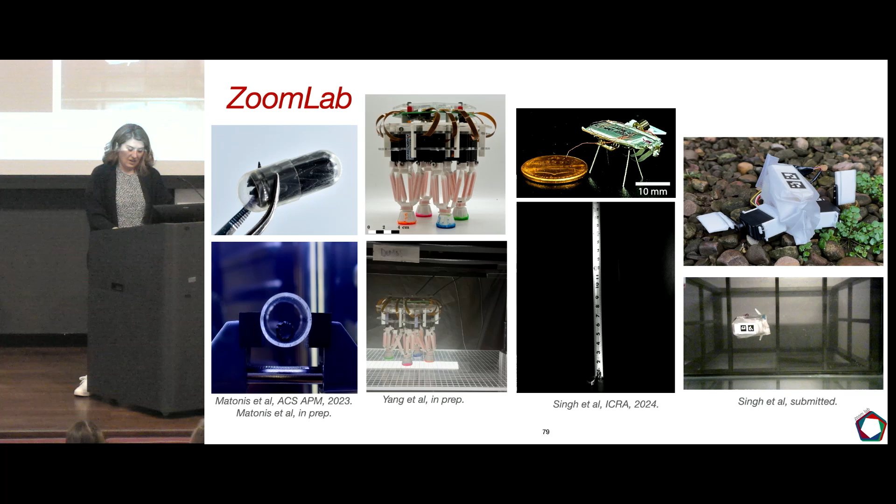So I want to stop here, and I hope I convinced you a little bit of how I'm trying to make manipulation and locomotion in robots adaptable with these robots.

Oops. Where are my robots? My robots are not coming.

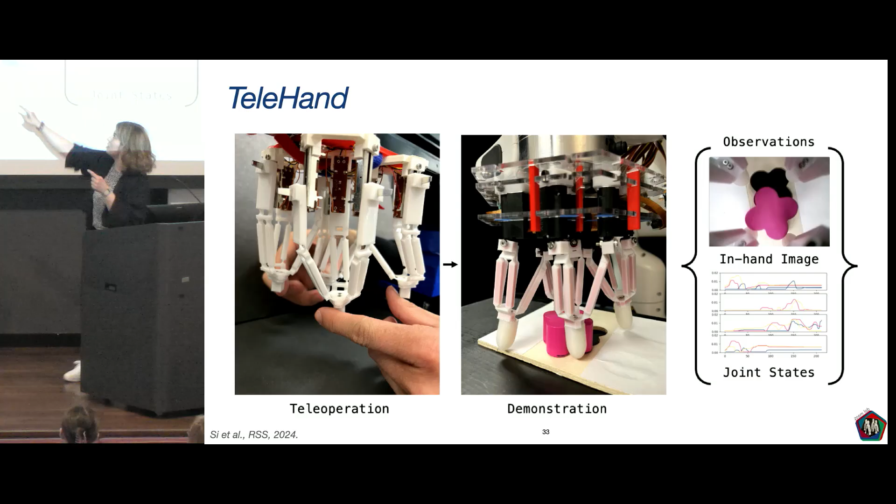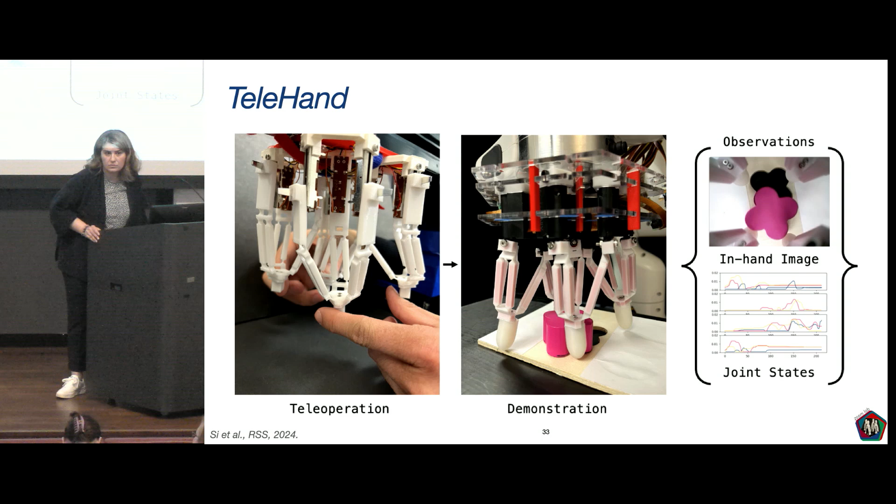Yeah. So does that mean that the human has to interact with the machine by themselves, or in the left picture, the human has to teach the robot to act? Mm-hmm. Okay. Yeah, it's teleoperation. So as I move the kinematic twin, like that telehand, then my robot moves. And it is imitation learning. I am basically teaching my robot how to act, or what kind of actions it should do to put that shape into the pattern, right?

There was another thing that I wanted to say, but I forgot. Also, one more thing. You said human interaction with robot. So keep in mind that there are no sensors at the moment on these robots. So this is not a haptic interface. The operator doesn't have the feeling of what the robot feels. So this is another project that we are working on: what kind of sensors we need for the fingertips, so that we can properly understand what is happening there. Because it's not only the force, it's also sliding, twisting, different kinds of modalities.

So you won't be feeling the forces that the robot's applying. So that is a little bit difficult. But still, people find it doable with vision, or just looking at the robot itself. Okay, thank you very much. Yeah, you're welcome.